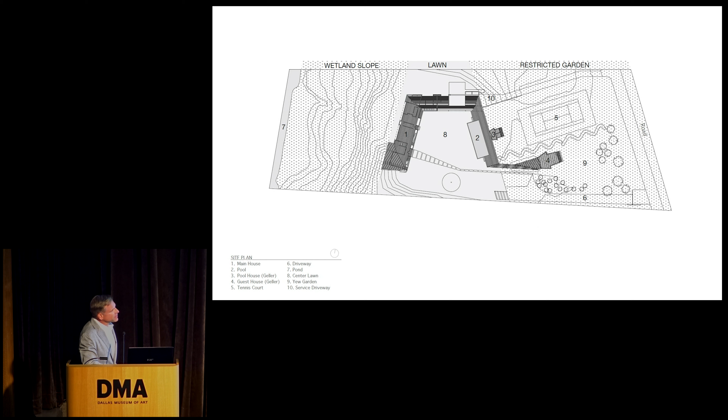And we thought about that, going back to the Geller structures as this elevated walkway. How can we have this idea of an elevated walkway weave all these components together, but manifest as an expression in the architecture?

And so this is the beginnings of the project, where we still build a lot of physical models in our office. I don't know how many people still do that, but for each project it could be 20, 30 models. This is probably the final model that we did. But you can see that we started with this elevated walkway originating at one of the Geller structures and working its way and sort of growing into the house.

And one of the goals, and a lot of it we were talking about, was to just, how do we design this house as not to make the Geller structures look insignificant? And one was that the house would not be taller than those existing structures. And fortunately, we were able to do that because the ground was sloping away towards the wetland.

So it is a 2-story structure, but from the approach, it really appears as 1 story. And the house is tapering. So starting from the Geller structures, as it rises towards its termination, it's increasing in height.

So just from the floor plan, I'm getting there. So having this elevated walkway, connecting, there's a pool area, an outdoor area. There's some family spaces in here, kitchen, living, dining, and ending up at the living room with a deck that's overlooking the wetlands. And then the plan to the right, this is the space that was below.

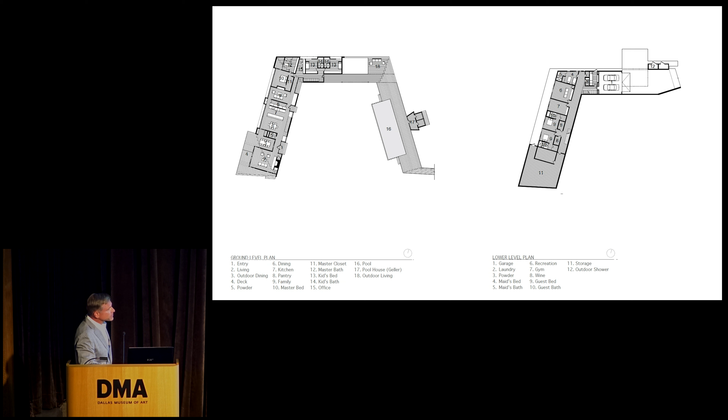It's like a pedestal. That are some support spaces for the house.

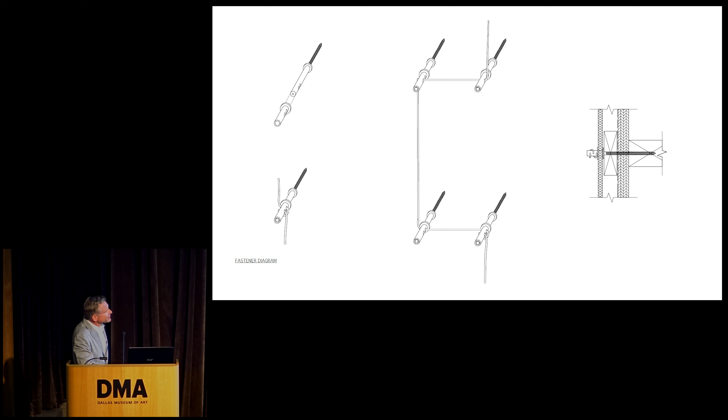Okay, so this next project is located in a town, Amagansett, New York. I'm gonna come clean, this is my own house. So anyone that's designed their own house knows there's some challenges associated with that, but I think it was pretty successful. We're happy living there.

But the appeal of it, having 3 young children, so again another family of 5, wanted to be in the town. The kids could walk to school, they could walk to the library, but anyone that knows the eastern end of Long Island knows it can get pretty busy and noisy. So of course that came up as a concern from my wife, that we're just gonna hear everyone all the time.

So this is a pretty good diagram. There's the main street of the village, and we're right there. Not too far from the ocean, quick bike ride.

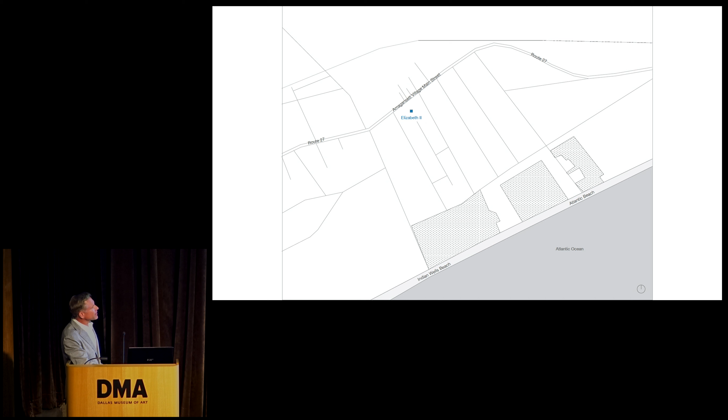So thinking about it, was, all right, what's the jumping off point? Dealing with the acoustics, and it's not something that I was really experienced in, whether it's my professional or academic experience, but some of the basics is mass and thinking about a series of parallel walls that could create this acoustical shadow from the main street where the noise is coming from.

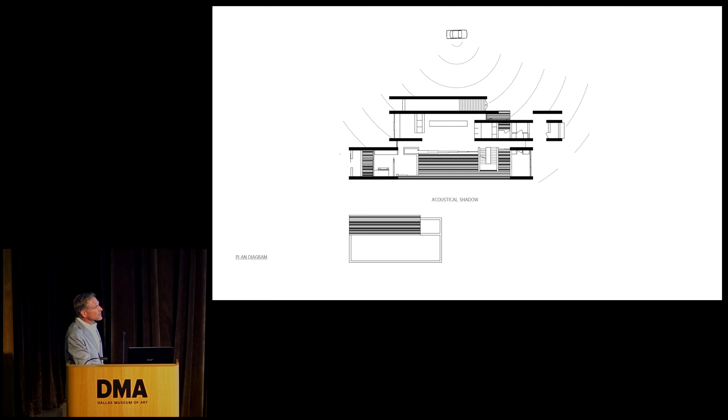And it started as an interesting diagram, and then sectionally, also thinking about that and looking at these series of walls, not only in plan, but in section, and this ascending height, and there's this human scale as you approach it.

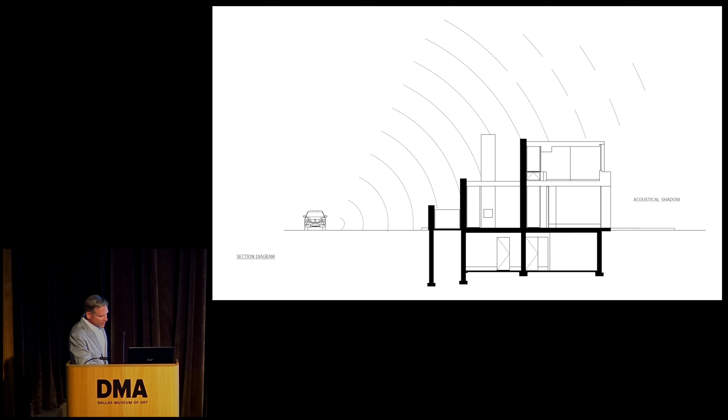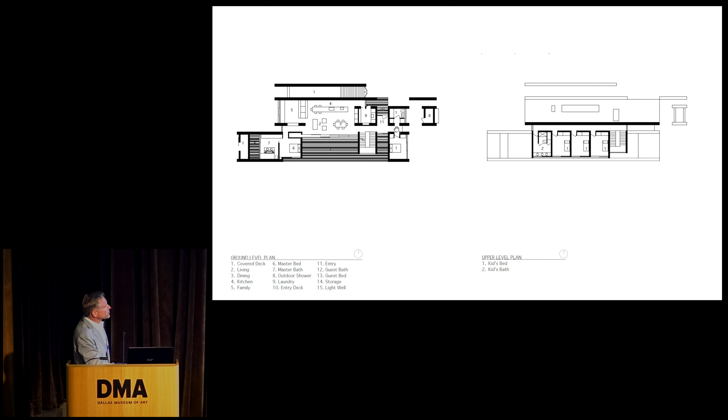So the way that the house worked was you come in, you can slip between them. The main entrance is the only area that punctuates all the way through the structure, but there was this circulation that ran through these series of parallel walls.

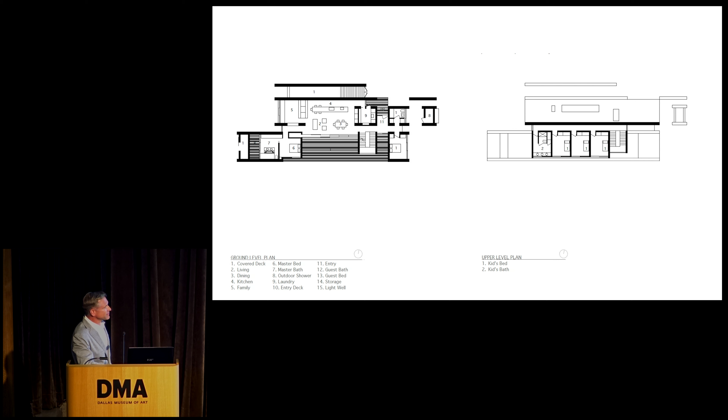There's 2 bedrooms on the first floor, bookending the house, and then in the center is the kitchen, living, dining, and to the right is the second floor. That's where the kids live, and I don't think I've ever been upstairs. You can't go there.

And what we did use was, you probably know, it's called insulated concrete forms. It's the first time that I used it. It was an interesting structure. It's a series of these units, these blocks that have insulation, but the insulation is used as the formwork to cast the concrete. So they stack them together, tie it all together with rebar, and you pour the wall.

And for our area, it worked really well. Being in a hurricane zone, we had the freezing winters, and acoustically it worked great.

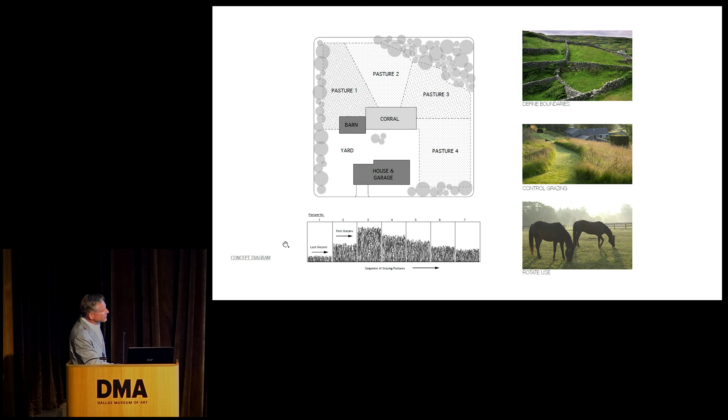We started looking into how these pastures worked, and it was very interesting—you'd have the corral or barn, and a series of defining boundaries, whether walls or fences, creating zones. They'd have livestock in one, and as that was depleted, they'd move them to the next pasture, giving time for the first to regenerate—this cyclical process is how they ran them.

So we looked at that and thought, here are some of the influences of the property. This is the property line, and we had a fairly busy road here. This was less busy, the driveway. But opening up to the back, we had views of the pasture and the sunset.

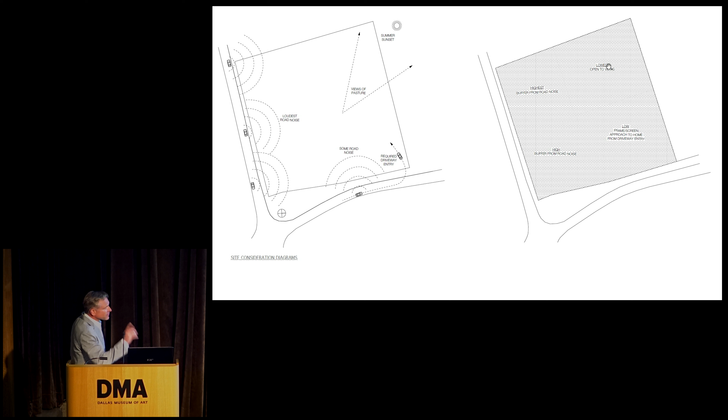Thinking about the landscape rather than architecture, we had a zone of highest buffer from the road noise, whether plants or topography, then starting to drop into where the entry would be, and then the lowest as it was facing towards the view.

In the layout of the site, we stuck to that diagram, having the highest point near the road. We brought up the topography with some retaining walls, another high zone, then a low zone where the approach gave glimpses of the house, and then the lowest, which became the lawn out to the pasture.

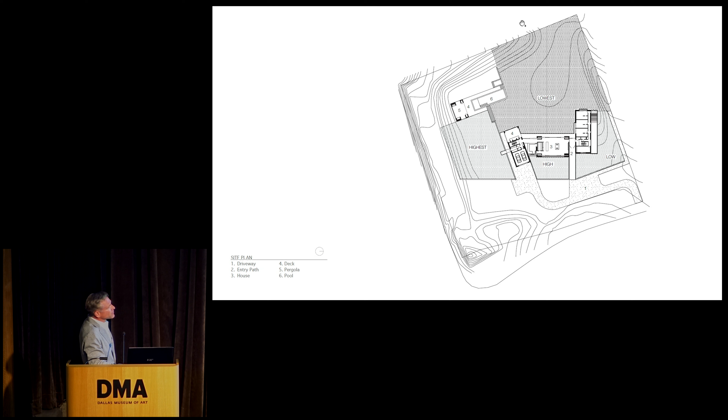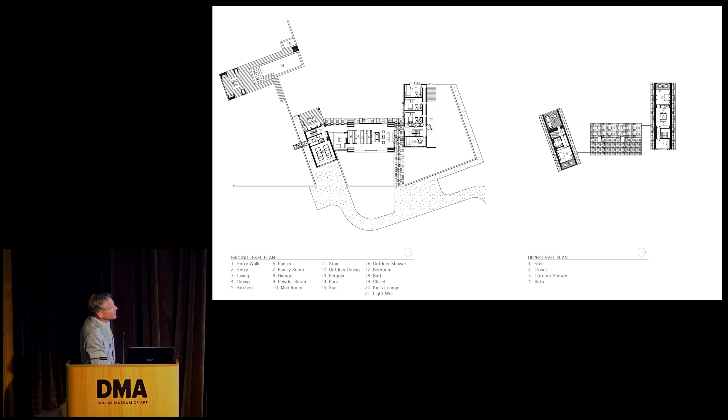The house was broken up into three zones: a family wing, the main kitchen, living and dining, and then a service area with some guest space above. Between each of these volumes we had interstitial spaces—a family room and the entry. The second floor was where some of the bedrooms were.

In doing that, we got excited about the idea that the grasses reflecting the pasture could be used architecturally—so we said, that's thatching. We proposed to the clients to do some thatching on the house, and they said, that's great, who's going to do it? And we couldn't find anyone.

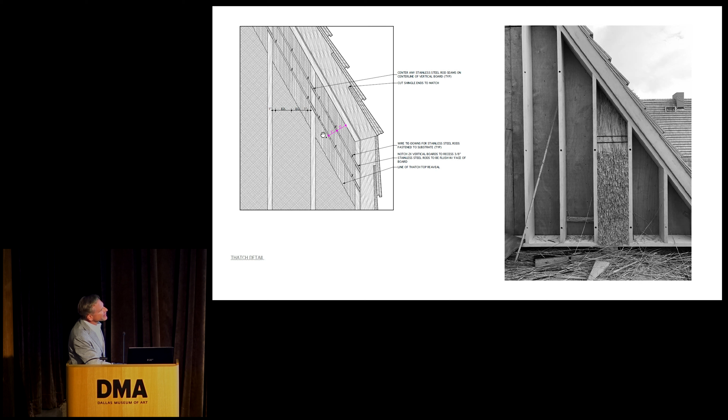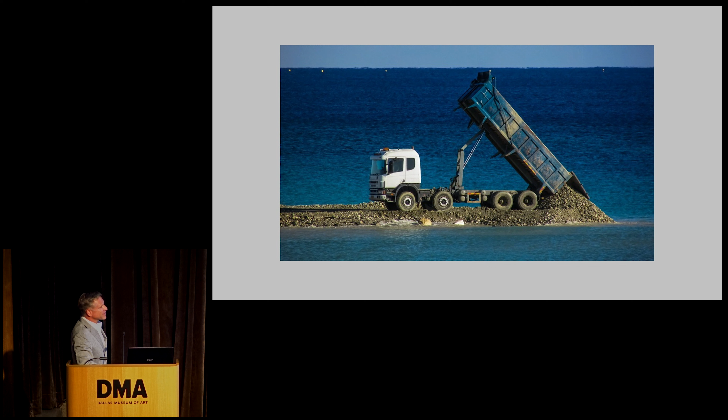They're located in a cove, and the cove, the property itself is on this peninsula. So we did a little research to just see the history of the peninsula, and we found out the peninsula was never there. It was made by dredging and just dumping excavation there.

Some of the basics, you've got to elevate the house, but the other part is, where do you put the water from the roof? If you dig down 12 inches, you're in groundwater.

There's this sort of folded roof plane, and there's a series of apertures in the roof, and as I'll get in, I'll explain that a little bit more to you, the functionality of that.

Another family of 5, and they had the bedrooms, kitchen, and a family room, and the spaces between those volumes were the interstitial spaces, these public spaces like the dining and living.

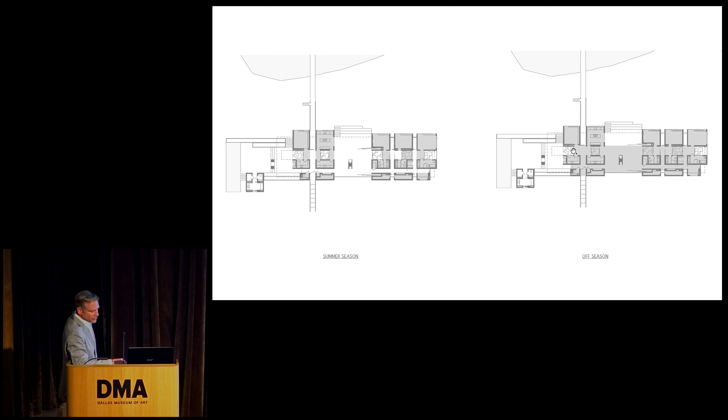So here we are dealing with the water again. The first thing we did was lift the house, putting it on pilings because the soil was incredibly unstable. It was pretty interesting.

What we thought about was this roof, shaped as you saw from the aerial view, directing water into these drainage light wells. Similar to the other project, we can store the water, but here the groundwater was up, so we'd be storing it all the way up to ground level, celebrating it in each drainage well like a terrarium, an outdoor sculpture. The other part was getting the mechanicals away from the ground, and by shaping this roof we were able to accomplish space for that.

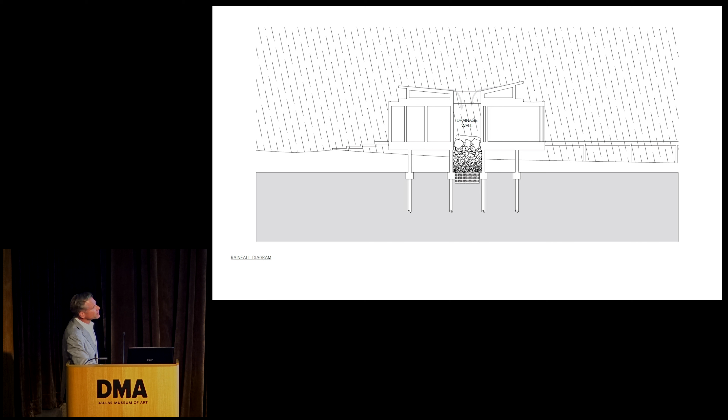Here's the plan in more detail, with the bedrooms and each of the drainage light wells and how they're landscaped, the dining and living room with this covered deck, the kitchen, pantry, and family room, plus some outdoor covered space and a pool and small pool pavilion.

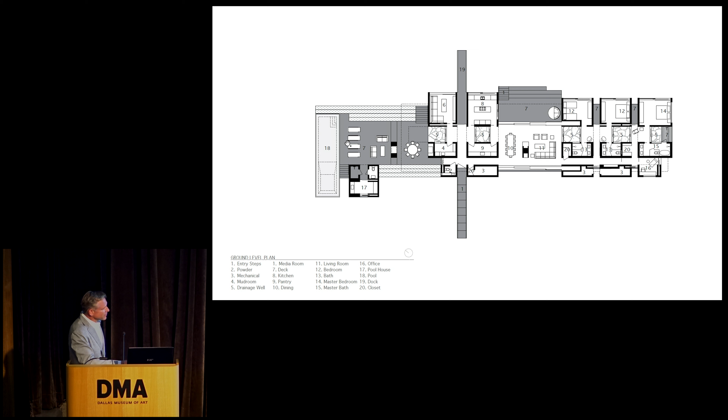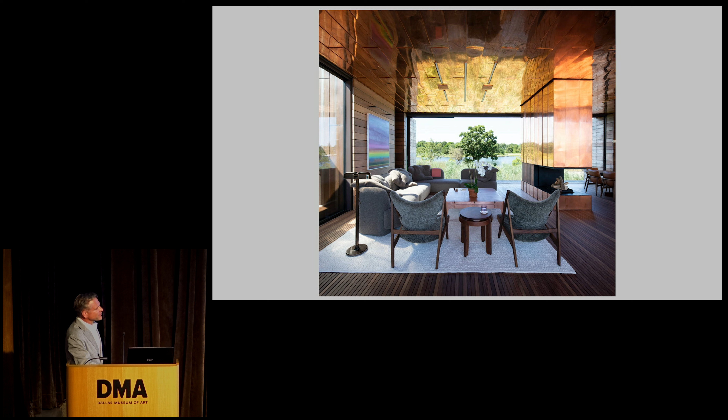In this particular project, our clients really embraced the process and were very excited about it. They told us they used to have a table in their old house that people would come and carve their name in, and they asked if we could design them a table for that.

So this is the main space, just living on the water.